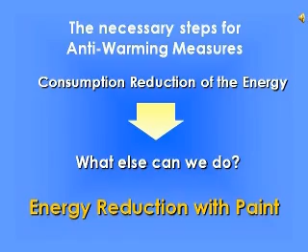Sci-Paint has developed SUPRA, a special emulsion resin paint that acts as a heat insulator to help stop global warming. Essentially, it is an infrared reflecting paint.

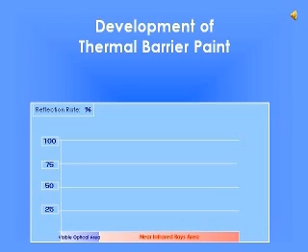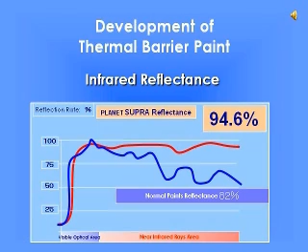Unlike ordinary paints that allow most infrared rays to pass through with only 52% reflectivity and heat the interior, SUPRA has a reflection rate of 95%, which results in a heat insulation rate of about 80%. These ratings of SUPRA have been confirmed, and it is a stable range.

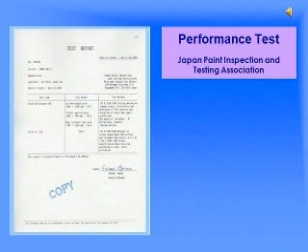Tests conducted by the Japan Paint Inspection and Testing Association showed a high reflection rate, over 90% in all wavelength bands, in the visible and near infrared bands.

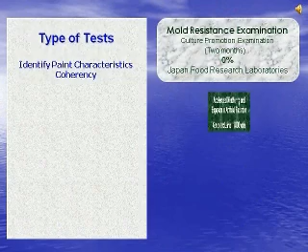In addition to the reflection efficiency, there are other important qualities. SUPRA is easy to use and easy to store. We conducted the following tests for adhesion properties and it passed each one: JIS standard test, Eriksen test, DuPont style shock test, crosscut test, mold proof test, ultraviolet degradation promotion test, mildew resistance test, and VOC emission test.

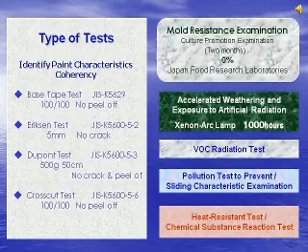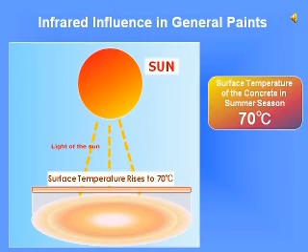In summertime, when the surface temperature rises to about 70 degrees, the indoor temperature could rise close to 50 degrees when regular paints are used.

Thermal barrier paint SUPRA, with a reflection rate close to 95%, can effectively reflect sunlight from the roof. This is because SUPRA is made up of spherical silica that enhances the insulation efficiency to keep down the temperature. This could keep indoor temperatures down to 28 degrees and reduce air conditioning energy greatly.

Here is an estimation for a 2,000 square meter factory painted with Planet SUPRA. The temperature of the unpainted factory can reach 70 degrees, whereas the factory painted by Planet SUPRA is able to keep the temperature around 35 degrees.

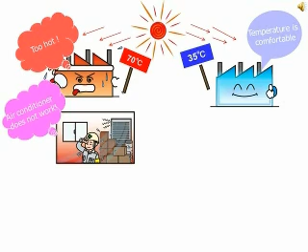If the indoor temperature rises to 70 degrees, workers cannot work without air conditioning. But the workers can easily work with the windows opened at the factory painted by Planet SUPRA, due to the comfortable temperature of around 35 degrees.

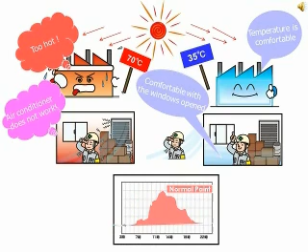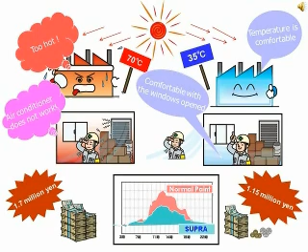We can see the big difference between the two factories from the electricity bill: the unpainted factory has to pay 1.7 million yen annually. In contrast, the SUPRA painted factory will pay only 1.15 million yen, an approximate annual saving of 33%.

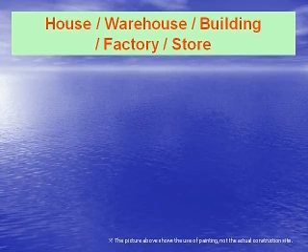I guess you all got the picture of SUPRA. Now let's think about the many ways of using it. In general, houses, hospitals, buildings, factories, warehouses, and it could also be used in some special fields.

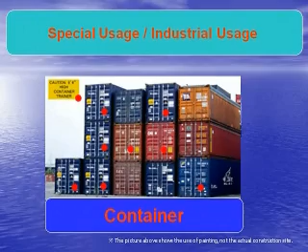Freight containers are an essential part of the transportation of goods. To ensure the quality of the products inside, it has to have a moderate temperature.

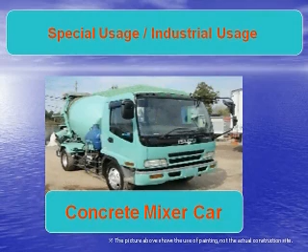Concrete mixer trucks have a time limitation for transporting raw concrete. Heat affects the stability of the concrete, which affects the quality and safety at the construction site. It is important to moderate the temperature of the mixer.

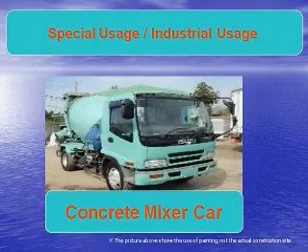Shipping vessels could use SUPRA to help maintain the quality of transporting liquid natural gas and other things. Cow barns and poultry farms would be free from the stress caused by heat, which would have positive effects in increasing milk and egg production, and could benefit from the use of SUPRA.

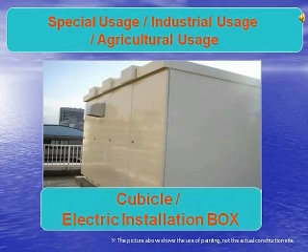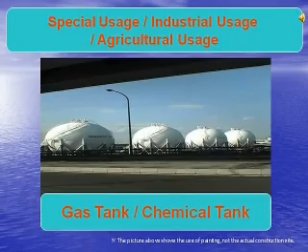SUPRA can also help prevent overheating of cubicles, outdoor electrical equipment, gas tanks, and chemical tanks by keeping down surface temperatures, thus ensuring quality and stable conditions.

In addition, SUPRA is a product of the Carbon Offset Project. Because global warming is related to carbon dioxide, Carbon Offset Japan and the Kyoto Protocol are now cooperating to achieve the goal of reducing CO2 to certain target levels as specified in the treaty, backed up by the government.

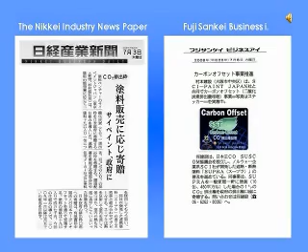As a contributor to that target and the environment, 10 cans of SUPRA constitutes a reduction equal to 1 ton of carbon offset. This is the first attempt at carbon offset through paint. This news was covered by Nikkei Industry newspaper, and many other industrial newspapers and chemical magazines as well.

SUPRA is a paint to reduce carbon dioxide emissions, to maintain the global environment for a sustainable society. Please join Sci-Paint Japan activities to protect the environment.